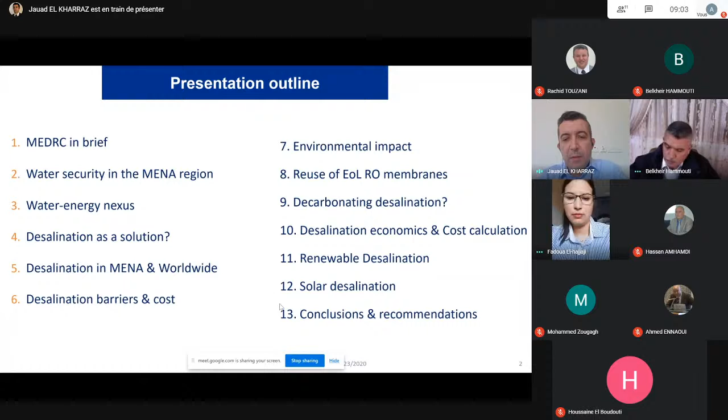I will try to cover also the connection between water and energy, and then go into desalination as a possible solution. What is the state of the art now? What are the challenges? What kind of solutions do we have right now, and how can we make it sustainable? And I will end with some recommendations and conclusions.

So MEDRC is, as I say, the Middle East Desalination Research Center, a research and training center based in Oman. It was created at the end of the 90s of last century. The main mission is to provide solutions for water scarcity in the Middle East and North Africa. We do that by boosting and encouraging research, capacity building and training activities in the region. We also transfer knowledge from around the world to the region, and we mainstream the latest technologies dealing with desalination in particular, and how we can help the region make it sustainable.

Those are some photos from the center. We have a pilot RO desalination unit in the center. We have solar arrays, solar desalination units, and a solar still as well. We have conference rooms for trainings, activities, and workshops. We have an equipped laboratory, etc.

So just a few examples of projects that we are carrying out now in MEDRC. We have this project, for example, about reusing reverse osmosis membranes for wastewater treatment. As you know, with the increasing capacity of the desalination industry around the world, we also have an increasing number of membranes, which is a solid waste that we need to deal with. So we are proposing through this project to recycle or reuse these membranes for other applications. In this project, we are partnering with many partners from Spain and from Oman.

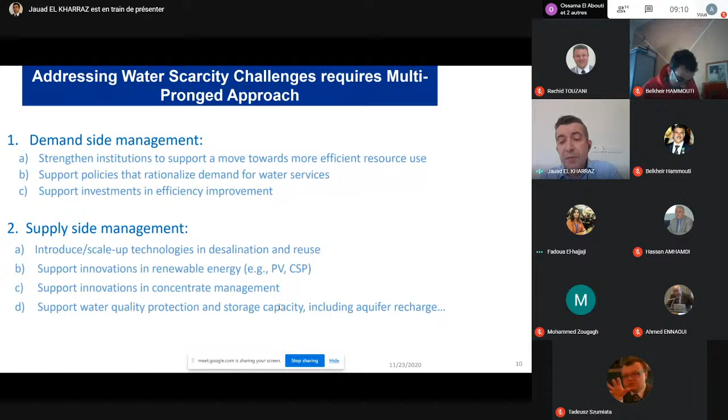We need to support innovation in concentrate management, which is one of the biggest challenges in the desalination industry. And we need to support water quality protection and storage capacity, including aquifer recharge, etc. In Morocco, by the way, we have a very interesting approach, which is le contrat de nappe, the aquifer contract, which is a very interesting approach to deal with the groundwater in Morocco.

Also, we need to talk about the water energy nexus. Why? Because water and energy are very interconnected. So to ensure water security, we need to take care also of the energy, because, for example, desalination consumes a lot of energy; it is an energy-intensive technology. If we talk globally, the water sector uses around 4% of global electricity produced. In particular, 40% for abstraction, 25% for conveyance, and 20% for treatment of wastewater mainly.

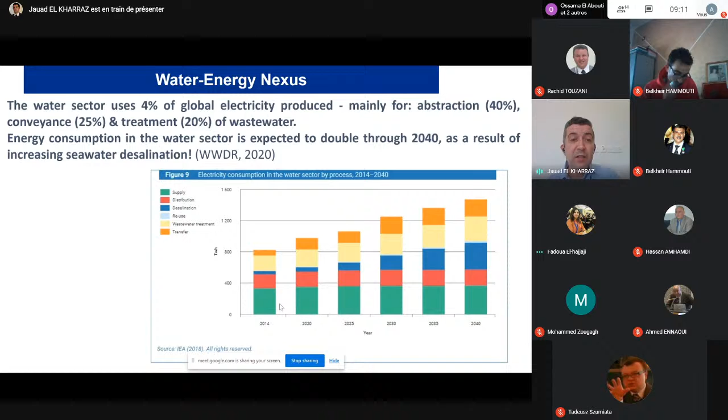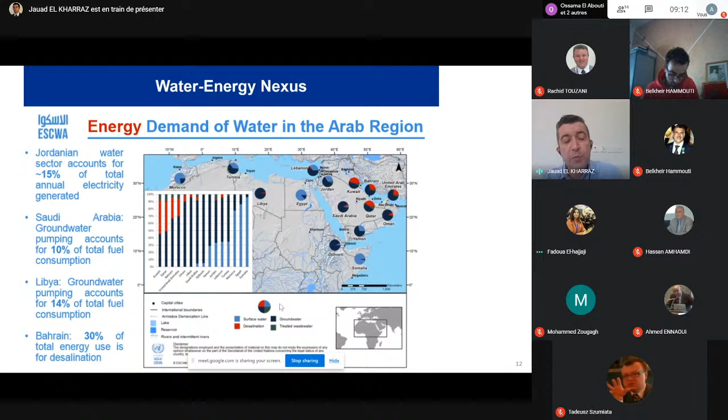Some facts from some Arab countries. For example, in Jordan, the water sector accounts for 15% of the total annual electricity generated. In Saudi Arabia, groundwater pumping accounts for 10% of total fuel consumption. In Libya, groundwater pumping accounts for 14% of total fuel consumption. And in Bahrain, 30% of the total energy used is for desalination. The statistics are coming from ESCWA in Beirut.

So, is desalination the solution to ensure water security? Obviously, this is a legitimate question. In the MENA countries, we have access to seawater. And if we look, 80% of the population is concentrated in the coastal area, and the big cities are in the coastal areas. So desalination definitely is a critical component of the solution.

And if you look at the water policies or strategies around the region, whether national level or regional level, for example, the Mediterranean Water Strategy, or the Western Mediterranean Water Strategy, or the Water Strategy of the Arab League, in all of those policies or strategies, you will find desalination as one of the main components of the solution.

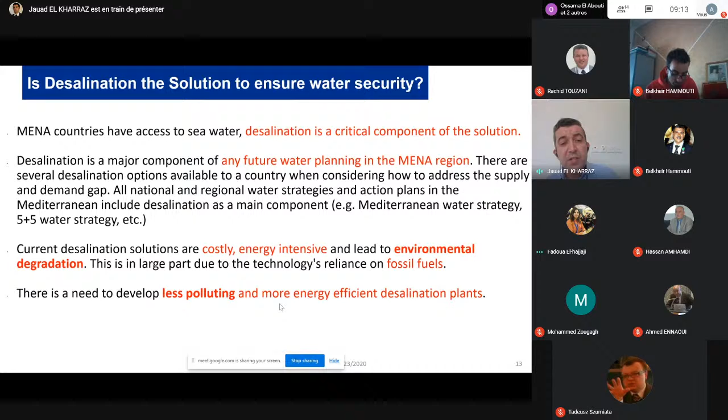But the current solutions actually are costly, energy intensive, as I said before, and lead to environmental degradation. We need to deal with environmental impact. And this is in large part due to technology reliance on fossil fuels. So there is a need to develop less polluting and more energy efficient desalination plants.

So what is desalination? Desalination technologies are, in general terms, water treatment processes that produce fresh water from saline water. That could be from ocean, sea, or brackish groundwater. As I said before, that represents 97.5% of the water available on Earth. Almost 97% of the available water on Earth is ocean or sea or brackish water.

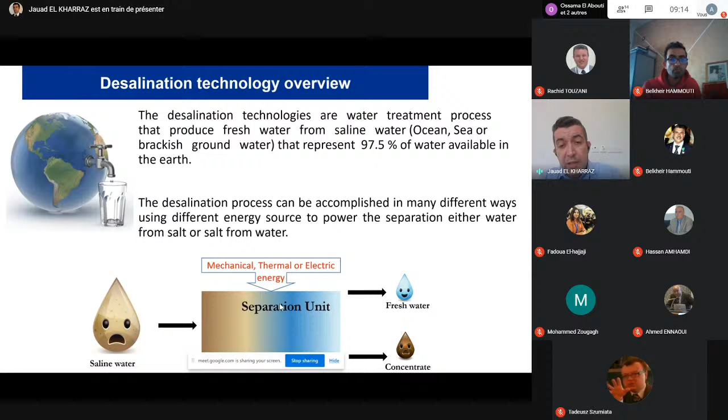So the desalination process can be accomplished in many different ways, using different energy sources to power the separation between the water and salt. So either mechanical or thermal or electrical energy to separate the fresh water from the concentrate or from the salt.

In general, we have different ways to classify such technologies, according to three criteria. What is extracted from saline water? Are we extracting salt or are we extracting water? Obviously there are some industries that are extracting salt and minerals from the salty water. Also the type of separation, whether we talk about thermal desalination or membrane-based desalination technologies. And the third criterion is the type of energy, whether we are using mechanical energy or thermal energy or electrical energy.

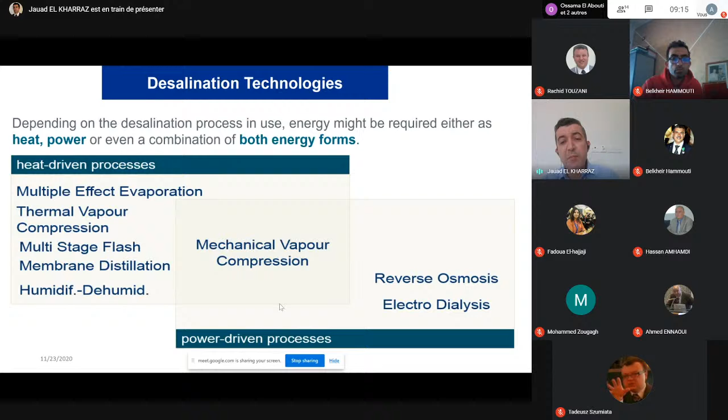I can show you here the most common or popular desalination technologies that we know. Energy might be required either as heat, power, or even a combination of both energy forms. So we are talking, for example, about heat-driven processes, in particular multiple effect evaporation, or TVC, MSF, the multi-stage flash, or MD, membrane distillation, or humidification-dehumidification. In the middle, using both energy forms, we can talk about mechanical vapor compression. And if we talk about only power-driven processes, we can mention reverse osmosis, RO, or electrodialysis, for example.

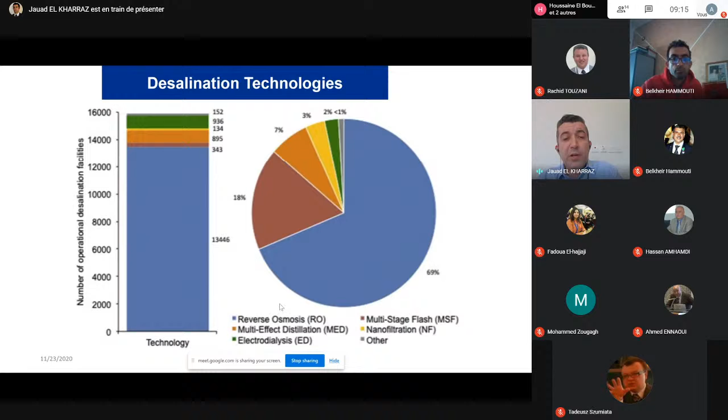Now, with the state of the art around the world, almost 70% of desalination plants are now RO, membrane-based technologies. Second in the ranking, we have MSF and we have MED. But according to the forecast for the upcoming years, RO will gain more and more margin in the market. So RO is the most popular nowadays. I will explain why later.

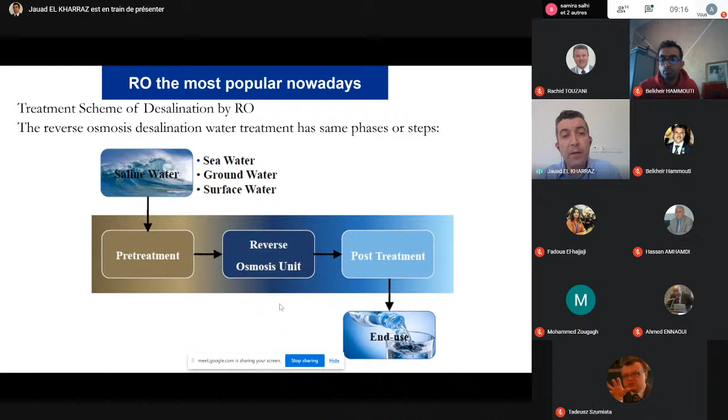The treatment scheme of desalination by RO. Whether we talk about seawater desalination or brackish water, groundwater or surface water, whatever the source of the saline water, we need the pretreatment first, then the RO unit, where we have the membranes and the different components of the RO system, and then a post-treatment. So we adjust the quality of the water depending on the use we are looking for, either drinking or agriculture, or whatever use we are intending in adopting RO technology.

In the pretreatment phase, obviously we have the intake and the screening. For example, we have the intake in the seawater to bring the water into the plant. And then in the pretreatment we use sand filters, we use cartridge filters. Sometimes we even use a DAF system, which is more common in the Gulf because of harmful algae blooms that proliferate in the sea. And we have some chemical injection. We need chemicals, obviously: chlorine, sulfite ions, scale inhibitor. So the pretreatment is important in order to push better quality water into the RO system.

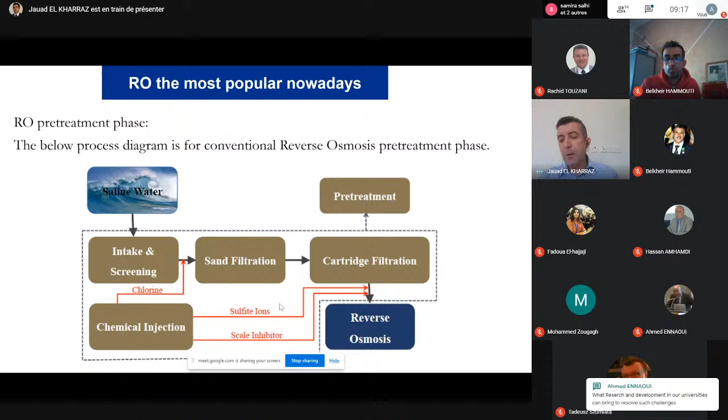And in terms of RO, we have the high pressure pumps, which are necessary; we need high pressure, so we need high pressure pumps in the RO system. We have the RO modules or membranes. We have the energy recovery devices, which are meant to improve the energy efficiency of the system. And we also do cleaning.

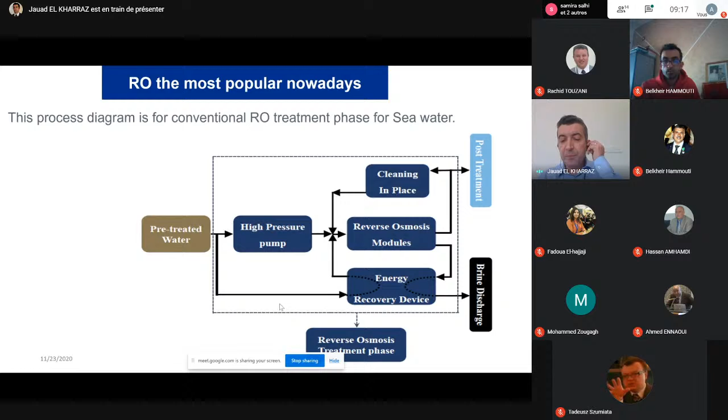So we produce fresh water from one side, and we produce the brine discharge, or the very salty water, that I will talk about later. And then obviously we have the post-treatment. In the post-treatment, we need to adjust the pH and remineralize, add some minerals. Much of the bottled water on the market uses desalination. Once they have the desalinated water, they need to add some minerals, and depending on the brand, there is less or more concentration of magnesium, sodium, etc.

And we also do disinfection. So again, it depends on the end user, whether it is the consumer at the houses, or the farmer, or whoever is the user. So we adjust the quality of the water accordingly.

Some facts about desalination. If you look at islands, for example the Maldives, a very popular tourist destination, or Malta, which is very close in the Mediterranean, or the Bahamas, all of them meet their water needs through desalination. Energy is the largest single expense for desalination plants. As I mentioned, whether thermal or membrane desalination technologies, around 30 to 50% of the cost is from electrical energy.

Desalination plants around the world consume more than 200 million kilowatt-hours each day. It takes 2 liters of seawater to make 1 liter of fresh water; it depends on the efficiency of the system, this is just an average. Desalination takes only a quarter of the electricity to generate drinking water as it did in the 80s of the last century. Huge improvements in energy consumption: we have more efficient pumps, better membranes, and better energy recovery devices.

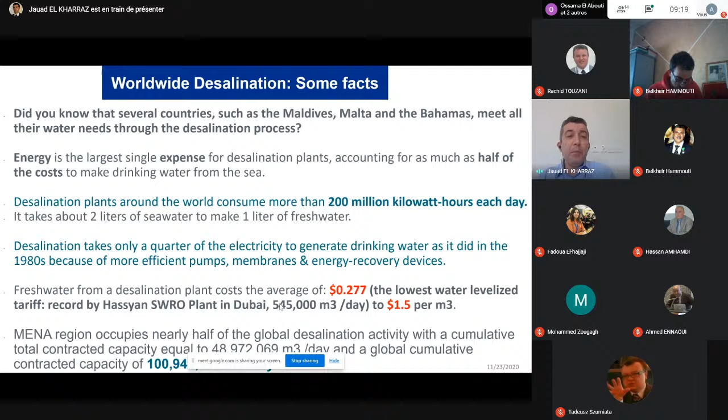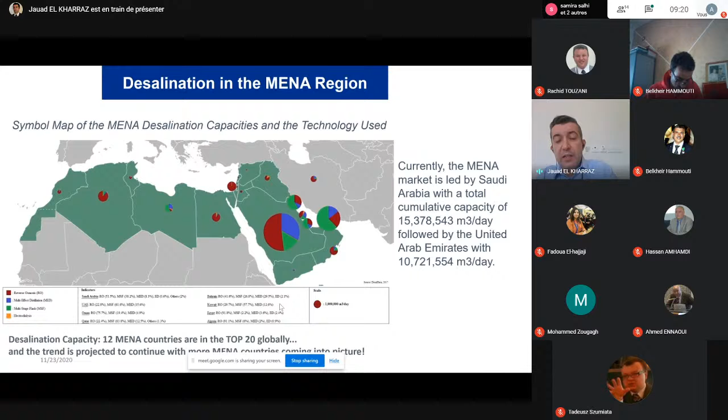The MENA region is producing half of what is produced in the world in terms of desalinated water, around 48 million cubic meters per day. The first producer of desalinated water is Saudi Arabia, with a capacity of more than 15 million cubic meters per day, followed by the UAE, then other Gulf countries like Kuwait, Qatar, Bahrain, Oman, and Algeria, and increasing capacity in Egypt. Jordan has a project, and in Morocco and Tunisia we have many projects in the pipeline.

The first phase will produce 275,000 cubic meters per day, and there is an expected extension of around 175,000 cubic meters per day, which will make the plant produce 450,000 cubic meters per day, one of the biggest plants in the world, producing water not only for drinking, but half of it will be for agriculture. So this is a very interesting project in Morocco.

This is a photo of it; it's still under construction. As I said, it will be operational next year, and the first phase will produce 275,000 cubic meters per day. It is developed by Abengoa, the Spanish company, and it is an RO plant.

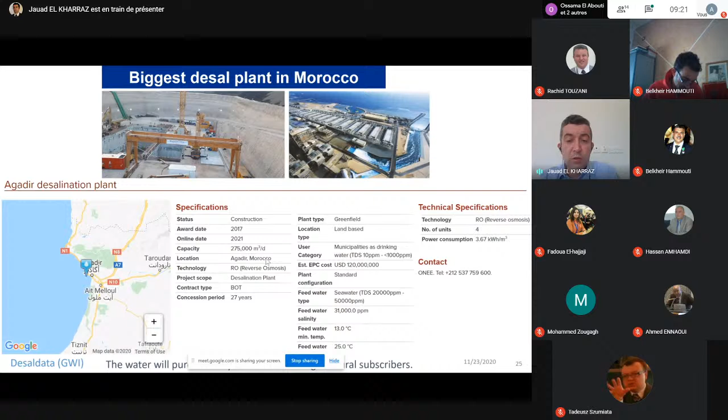Also desalination, as I said, is in general used to produce drinking water. Almost all the Gulf cities, for example Dubai, Doha, Muscat, all of them are consuming desalinated water. But we also have some applications in agriculture. In the south of Spain, Almeria and Murcia, because of the agriculture activity and the water scarcity, they are using desalination also for agriculture. And in Oman as well, in the north of Oman, a lot of farmers, around 100 farms at least, are using desalination units to produce water for their agriculture.

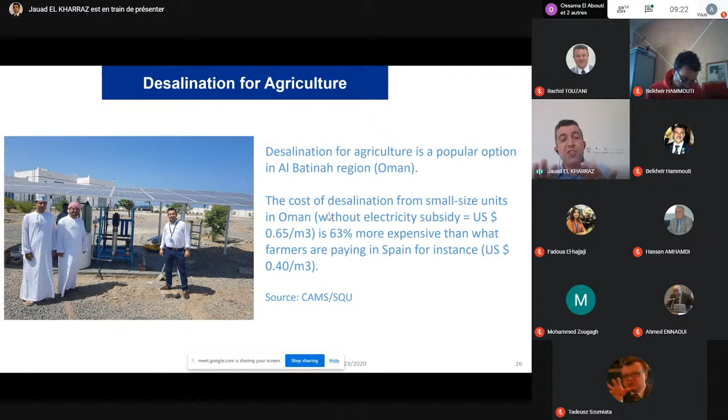And the cost is actually around $0.65 per cubic meter. But again, this is a complex aspect because we are talking about a price without taking into consideration the subsidizing of electricity. Here, water and electricity are very heavily subsidized. Obviously, this reduces the cost. Otherwise, the cost would be much more expensive. In Spain, $0.4 per cubic meter, but there are some considerations. They are mixing fresh water with desalinated water, and this makes the water affordable for the farmers.

Is desalination a sustainable solution? We have some of the biggest challenges, as you know: energy consumption. Thermal desalination, we're talking about 10 to 20 kilowatt hours per cubic meter; RO less than 10, now around 3.5 kilowatt hours per cubic meter. We have the cost, capital or operational cost. We have what happens in RO plants especially, fouling and scaling, which happen often in the membrane. So we need to change the membrane or increase the operational cost.

And we have, in particular, the environmental impact. The energy consumption, carbon footprints. We know that Morocco and many countries in the region are all committed to the Paris Agreement in terms of reducing CO2 footprints. So we need to look at this, and we also need to look at the brine discharge, because desalination plants are producing fresh water, but they are also producing the brine, which is a very concentrated salty water, but also with some chemical concentration. We need to deal with it to reduce the possible impact on the marine ecosystem.

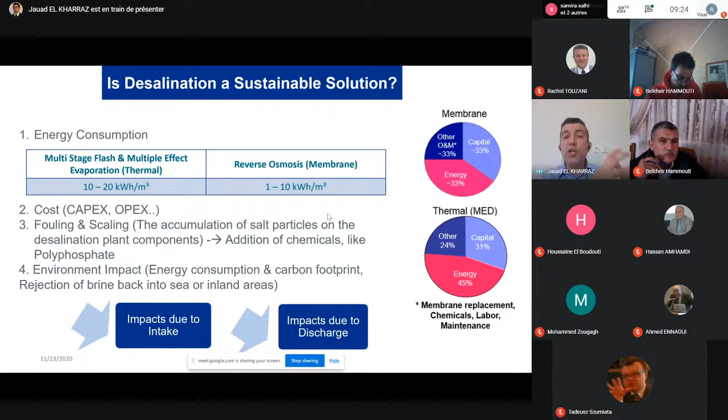And if we talk about brackish water, we also need to find solutions in order to avoid contaminating the groundwater. But there are also some considerations around the impact due to intake, because once you install desalination plants somewhere on the coastal area, you need to install an intake system into the sea. So you need to take a lot of considerations before installing your intake system. In terms of desalination energy consumption, as I said before, we have witnessed a very considerable

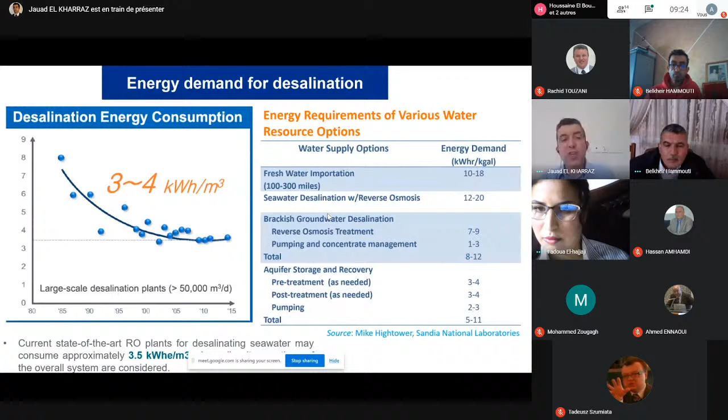other water options. These are some statistics about the energy consumption per cubic meter of water in desalination projects in the last 20 years. And you can see that we are now more and more going under 3 kilowatt hours per cubic meter.

Is there a question or something?

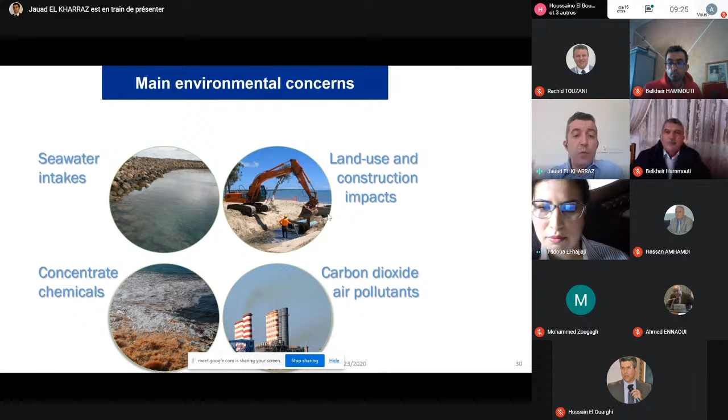It's okay. In terms of the main environmental concerns, we can talk about the seawater intakes. We can talk about the concentrates, chemicals, the brine. We can talk about the land use and construction impacts. And we can talk about carbon dioxide, air pollutants, or the carbon footprint, CO2 emissions.

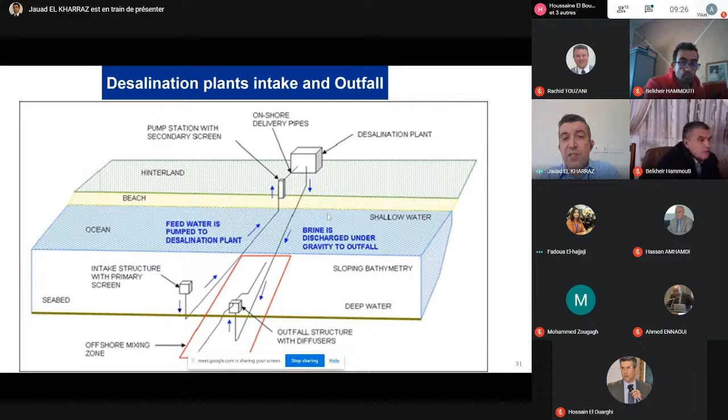In terms of desalination plant intake and outfall, this is very important. We are talking about projects that cost more than $100 million, even double or 3 or 4 times this cost. So we need to take into consideration many engineering considerations, but also many environmental considerations. This is just to show you the onshore delivery pipes and the offshore mixing zone. We need to find a way to discharge the brine safely without harming the marine ecosystem. The brine disposal is done in this way.

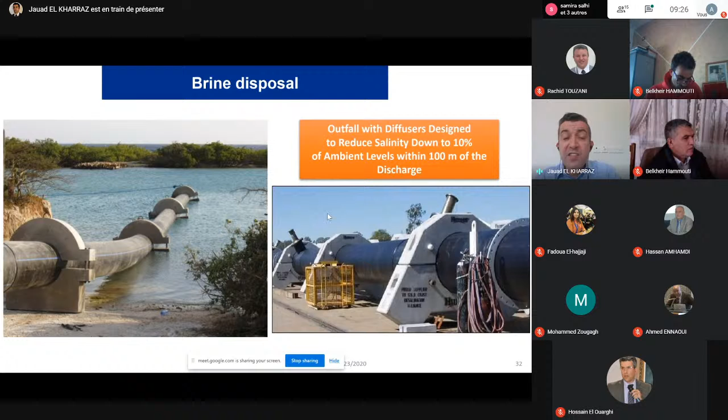The outfall with diffuser is designed to reduce salinity down to 10% of the ambient levels within 100 meters of the discharge. Obviously this is in general decided in the terms of reference of the decision maker in the country. Whenever you give permits to a company to construct desalination plants, you have some terms of reference that you need to deal with, and you have the environmental impact assessment study that you need to do in advance, in a way that seeks the least impact on the marine ecosystem. But again, even so, we have an impact.

Due to the intake already, we have the intake seawater, which is not mere seawater, but a habitat which contains an entire ecosystem: phytoplankton, zooplankton, larval forms of invertebrates and fishes. So you cannot just install it like that. You may destroy this ecosystem. The major impact could be on animals larger than the mesh, injury due to impingement effects.

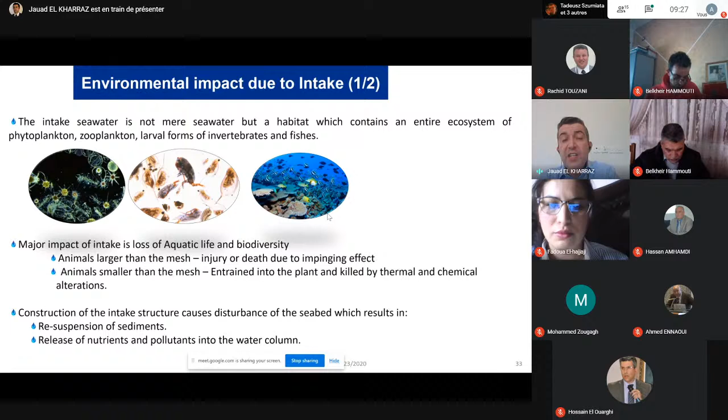So when you install your screening intake system, you may kill some fishes, the big ones, and also the smaller ones can stay stuck in the screening system, so you kill them that way. And the construction of the intake structure causes disturbance of the seabed, which can result in re-suspension of sediments and release of nutrients and pollutants into the water column.

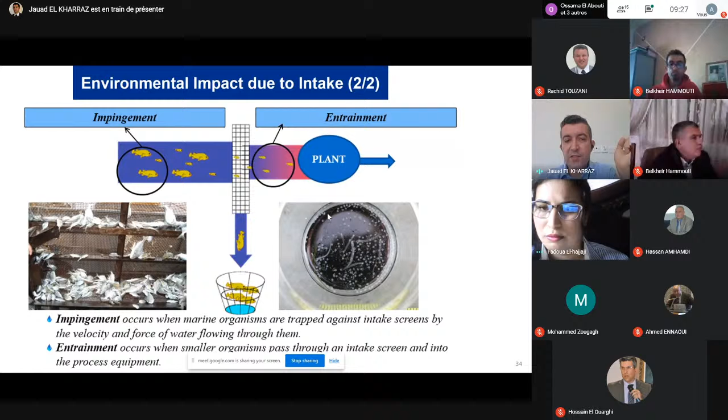So this is just to show you what happens for the big fishes and the small ones, what we call impingement and what we call entrainment that happen in the screen and the intake system. The brine discharge: the brine is a fluid waste from this plant, which contains a high percentage of salt and dissolved minerals. It is disposed back to the sea and diffused according to different aspects. So we obviously need to respond to the legislation. That's why it's also important to have a strong and strict legislation that the company should respect whenever it comes to those kinds of constructions.

And the brine discharge plume: the brine might be rejected directly into the ocean, the sea, or combined with other discharges. So we need to consider that. There are particular factors that play a significant role in the discharge plume. We need to look at the direction of the wind and the speed, the wave height and speed, the bathymetry, and the tidal mean and average. All these kinds of factors are considered in general in the environmental impact assessment studies.

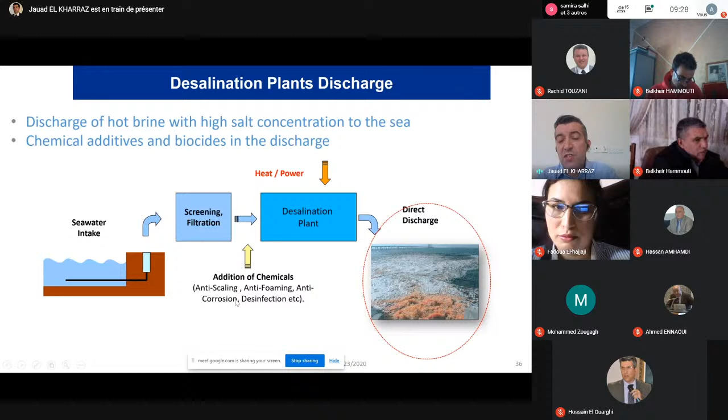So just to show you here quickly the discharge of the hot brine with high salt concentration to the sea, the chemical additives and biocide in the discharge. So you have this kind of configuration. You may find a lot of chemicals in this brine, which is discharged into the sea. The impact due to the discharge.

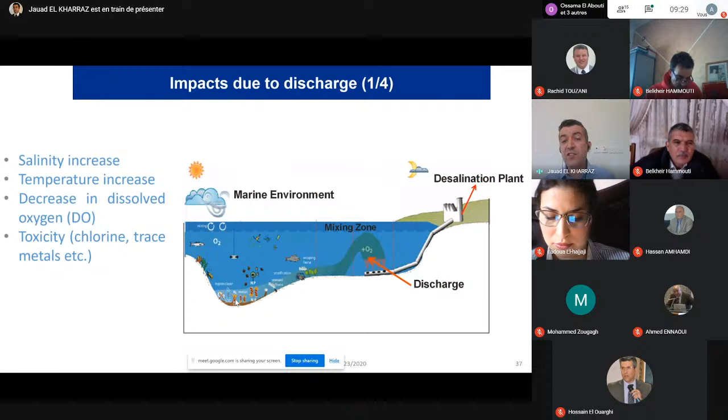So we have the impact of increase in salinity, an increase in temperature, especially in thermal desalination plants, where we have an increase of temperature in the brine, a decrease in dissolved oxygen, which may cause problems to the marine ecosystem and to the fish, and toxicity caused by the chlorine, the trace metals, and different kinds of chemicals that are used in the process. So for the high salinity, we need to take some measures in order to reduce the salinity increase, and the temperature also. And some important impacts are the proliferation of harmful algae blooms.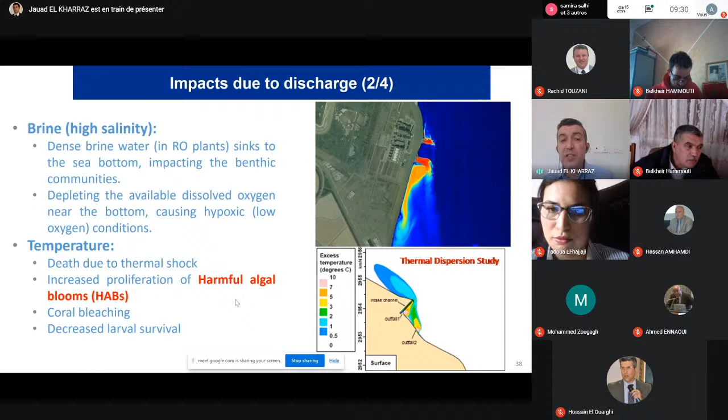I don't think that this problem is happening now in Morocco because we don't have a big desal capacity, and maybe on the Atlantic this problem is less important. But in some countries, for example in the Gulf, on the coast of Iran, we have a very big problem with that, even in California and Japan. So we have the proliferation of those harmful algae blooms, sorts of microorganisms that proliferate, and when they are in high concentration, they invade the coast, so they can get stuck in the intake system. If they pass through the desal system, they can destroy the membranes and cause a lot of problems.

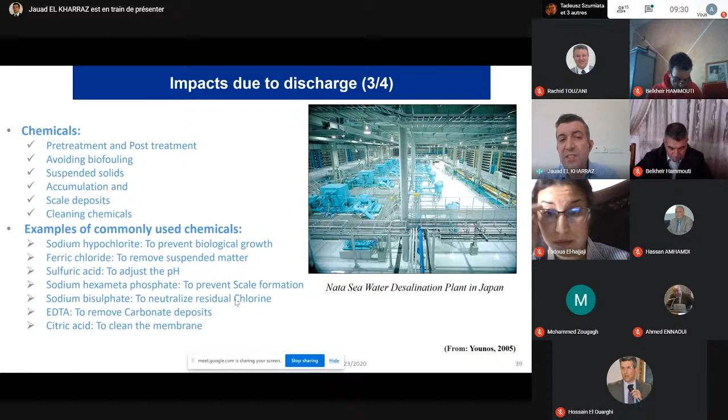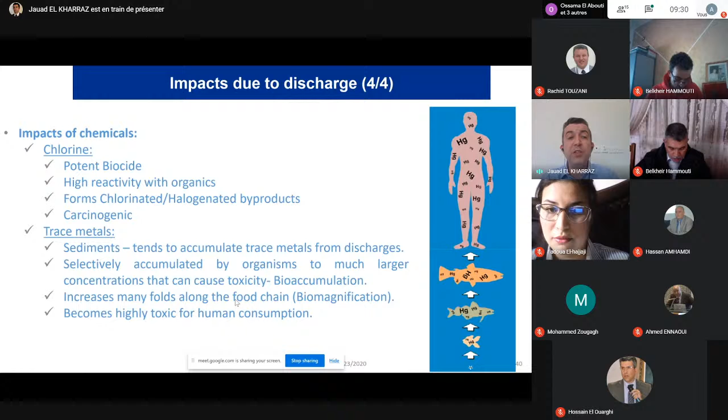In terms of chemicals, we use chemicals, as we said before, in the pre-treatment and the post-treatment, because we need to avoid biofouling and scaling, etc. And we have different kinds of chemicals. I will not get into details. Obviously, such chemicals can have an impact on the fish, but also on humans. If you consume such fish or shellfish or whatever seafood from this area, that could also impact human health.

I saw a publication, for example, showing the contrary, that in some areas where the salinity has increased, there is a better presence of the fish. So this, I think, needs to be further studied, because this is not really the case in general. In general, the increase of salinity will alter the marine ecosystem and has a negative impact.

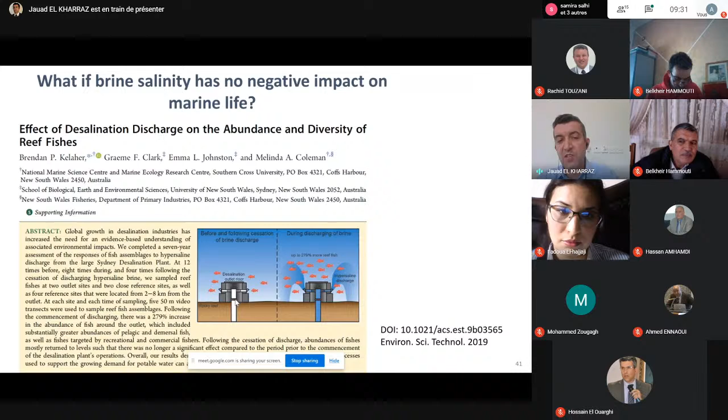So we need to mitigate those impacts. We can adopt mitigation measures for the intake and also mitigation measures for the discharge. The first thing is we need a proper site selection for intakes, which reduces the aquatic loss caused by entrainment. So we need to construct the plant in an area, as you can see here, where we take into consideration the current, the wind direction, and the area where the fish have the larval area or the spawning area. So we need to avoid those areas to make the right selection of the site.

In terms of impingement mitigation measures, we have some technical aspects that we can use: the light, acoustic fish deterrent, velocity cap. Sometimes we use vertical wells or infiltration galleries. For example, in Oman, there is one plant in Sur which is using beach well intakes. This is very interesting because the beach well intake provides better feed water quality. I think for 8 years they never changed the membranes.

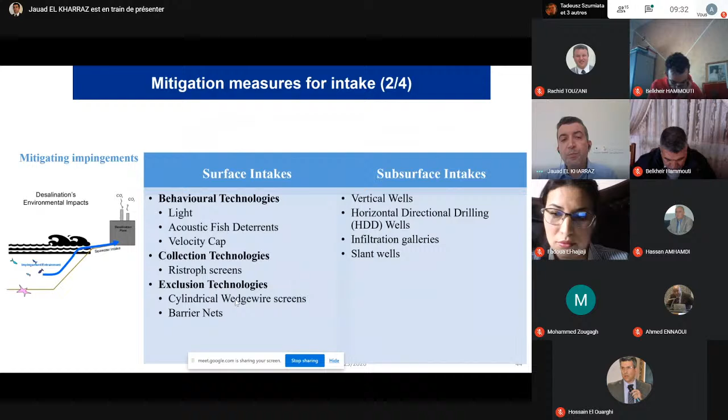But obviously the beach well intake, you cannot do it everywhere. It depends on the geology of the area and many other considerations. So these are just some techniques that we use in the intake system to avoid the passage of fish and some other sea life. And the subsurface intake, so we have different kinds of intake system. Again, this is horizontal directional drilling. We can do it in some areas, but it's not possible everywhere. And we have vertical beach wells as well.

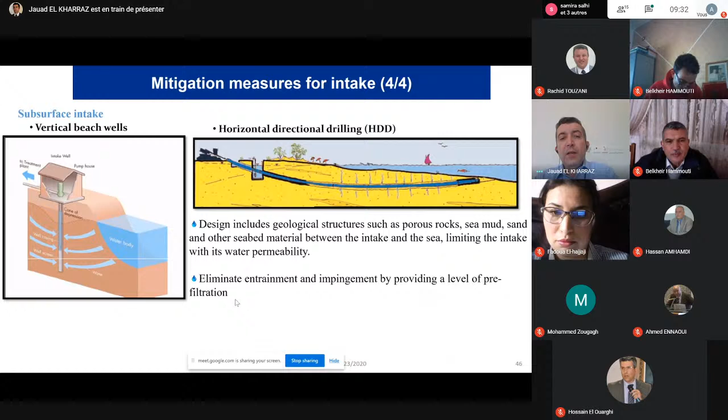The precautions that we can take: the impact on the population level is not clear given the naturally high mortality of larval organisms in marine systems. Appropriate screens and low intake velocity on open surface intakes can minimize the impingement, and locating intakes away from biologically productive areas can substantially reduce or eliminate entrainment of small planktonic organisms, etc.

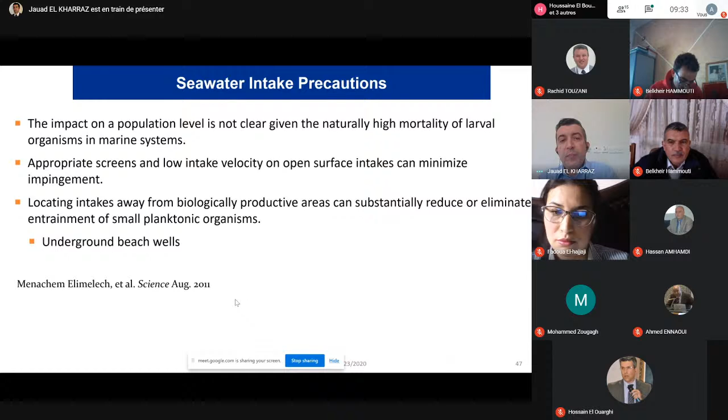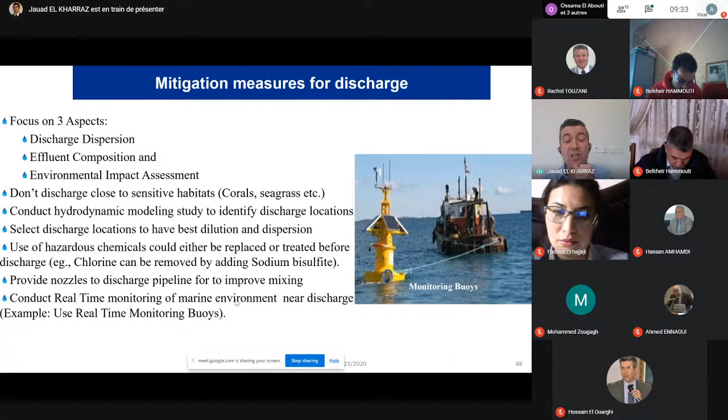So the three aspects that we take into consideration in the discharge are discharge dispersion, so we cannot just discharge in an area without dispersing this brine; effluent composition, so some legislation makes the companies try to reduce the concentration of some chemicals in the brine before discharging it; and the environmental impact assessment, which is a must whenever it comes to a desalination project.

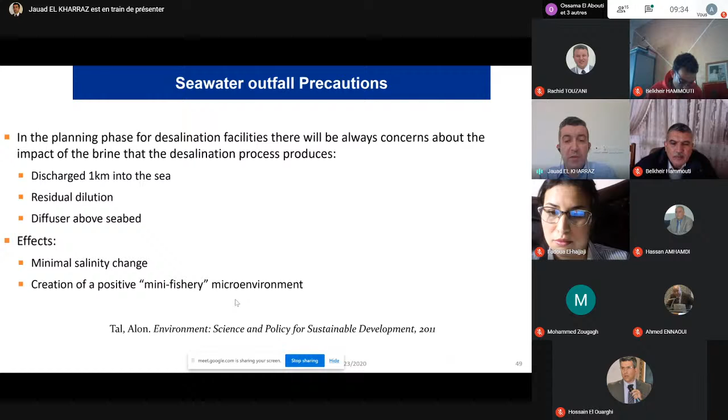In the case of brackish water desalination brine, we use evaporation ponds. It is very popular, but again, it's a very basic solution. But if you are dealing with a small desalination unit, it's fine. It could be a good solution. You put the brine into an evaporation pond, حوض تبخر, and you wait for this liquid to evaporate with the solar radiation, and then the concentrated salt, you can deal with it easily.

But we have other solutions, deep well injection, which needs a study of the geology of the area. We can have some other solutions, and even some industries are using the brine, extracting minerals and chemicals from this brine. So I'm not going to detail.

Another kind of waste we need to deal with in the upcoming years is the solid waste. As I said before, we have more than 20,000 desalination plants around the world, and RO membranes have a life cycle, they cannot last more than 5 or 8 years, sometimes even less. After the life cycle, we need to dispose of them. So landfill is the option in general, and it could add another environmental impact. So we need to deal with it.

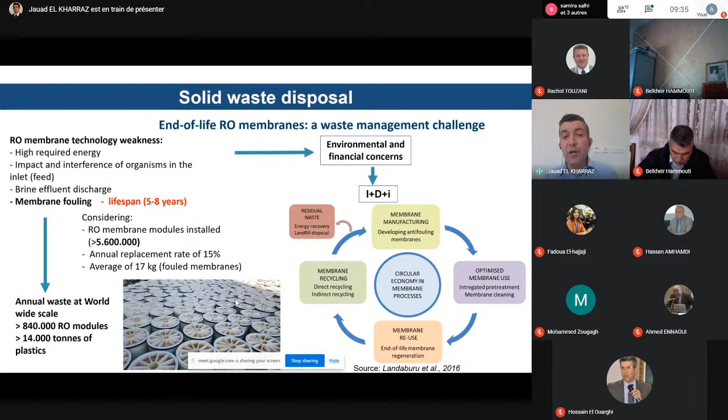So we have solutions. One project we are working on now in MEDREC is the use of end-of-life RO membranes to treat wastewater for industrial and agricultural use, which is funded by the Research Council in Oman. I'm the PI of this project, and the objective is to reuse, instead of disposing, those end-of-life RO membranes. We are extending their life. We are proposing another use for them. For example, by oxidation, we transform them from RO membranes into nanofiltration or ultrafiltration membranes that could be used for other treatment like gray water or other kinds of wastewater.

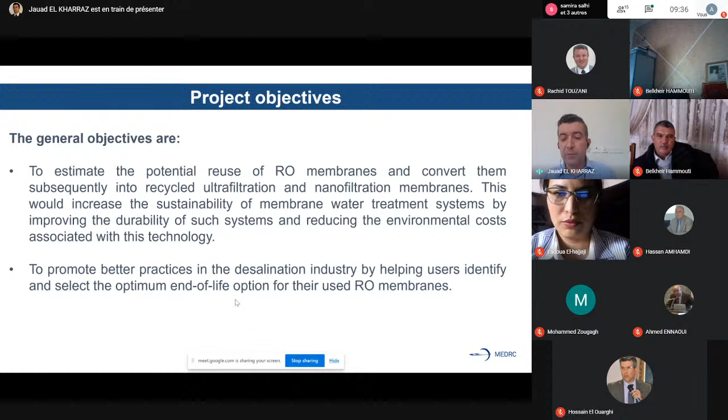So the objective is to reduce the cost of wastewater reuse, to recycle those end-of-life RO membranes, to provide desalination plant operators with a solution for their membrane waste disposal. We can treat wastewater using those kinds of membranes, and provide an additional water supply option for irrigation of sensitive crops.

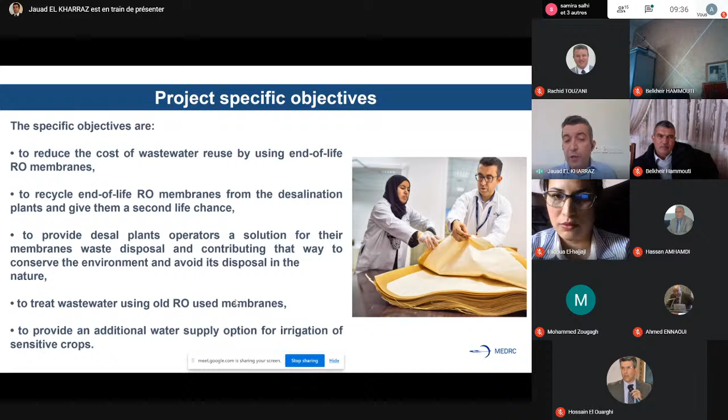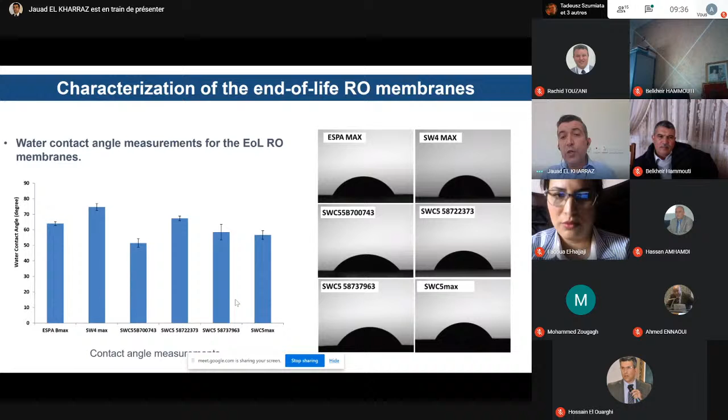So we collect those membranes from desalination plants, and in this project we first do the integrity test, and we do the characterization of those membranes. So we study the morphology of the membrane surface, etc. And then we obviously do the analysis of the permeability, the salt rejection, etc.

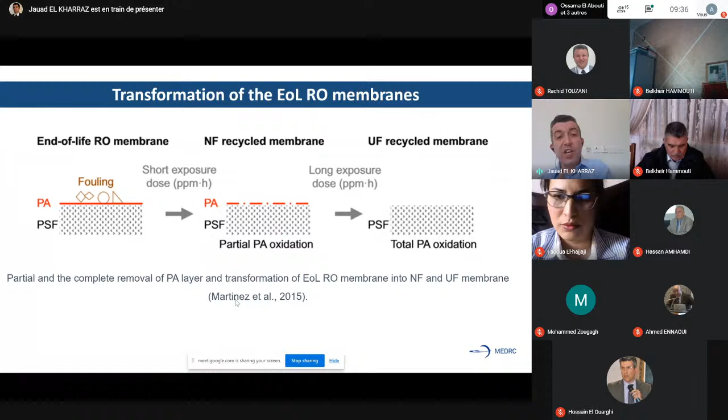And then we try to transform those membranes into, as I said, nanofiltration membranes or ultrafiltration membranes that could be used in other applications. We have another impact, which is the air quality. The air quality impacts of desalination projects are mainly associated with the use of energy during the manufacturing, transportation of materials, especially during the construction of the plants and all the associated infrastructure. So there is some air quality impact.

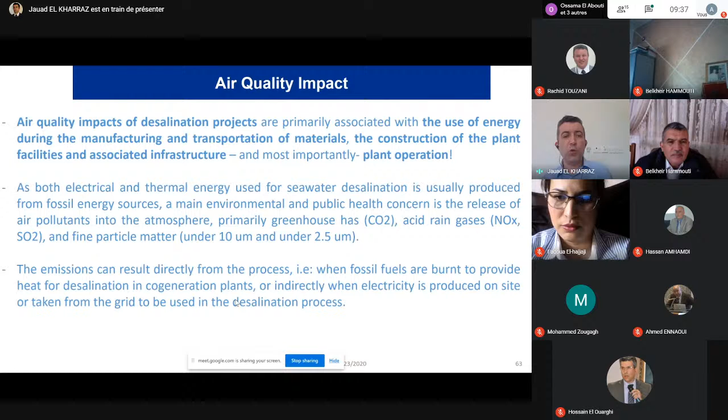Already we have an estimation of these CO2 emissions, and I will give some statistics here. In some plants in Australia and Spain, we have how much CO2 we are emitting from these plants. But I think if we compare it with other industries, it is not really that important. I mean, it's important, but not that considerable compared with other kinds of industries, textile or other industries. But I can give some statistics about the carbon footprint of the current systems.

As a fraction of the world energy consumption and greenhouse gas emissions, this emission is small, less than 0.2% of the worldwide energy consumption in 2013. RO is the most proper technology. We are talking about 1.5 to 3.6 kilograms CO2 produced per cubic meter of fresh water. Obviously, it depends on which kind of energy is used to produce electricity, fuel or coal or gas, etc. For MED technology, we are talking about 8 to 16 kilograms CO2 per cubic meter.

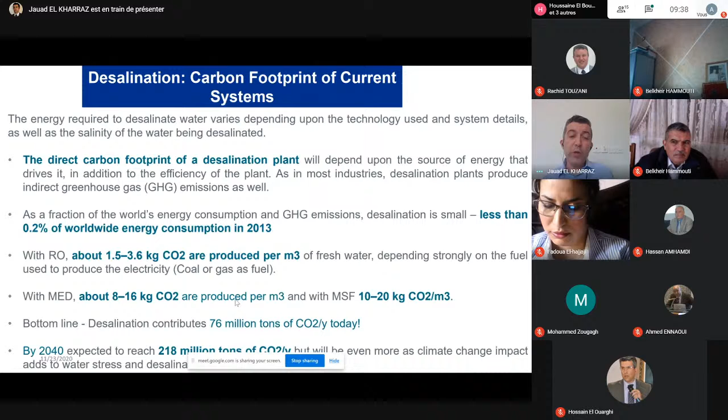So RO is much better than this, and it is expected by 2040 to reach 218 million tons of CO2 per year. So if we are really committed to the Paris Agreement, we need to make an effort in dealing with this.

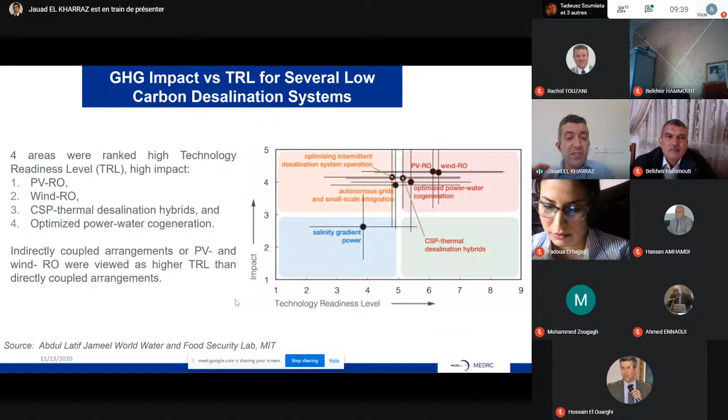This is just to show you a comparison between 4 technologies, greenhouse gas impact versus the technology readiness level for several low carbon desalination systems: the combination of photovoltaic and RO, the combination of wind energy and RO, CSP and thermal desalination hybrid, and optimized power water cogeneration. And we can see that PV and wind RO are the highest in terms of TRL, technology readiness level, than directly coupled arrangements.

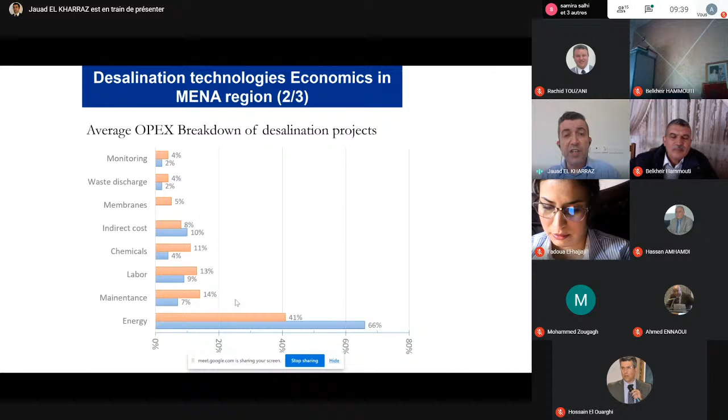In terms of the economics of desalination, the capex and opex, we can compare between thermal and RO membrane. I will try to go fast because I think we are already at 40 minutes. So some comparison between operational and capital cost of thermal desalination and RO desalination. It's clear that RO has been making a difference in the last years. That's why it is now becoming the first player in the market.

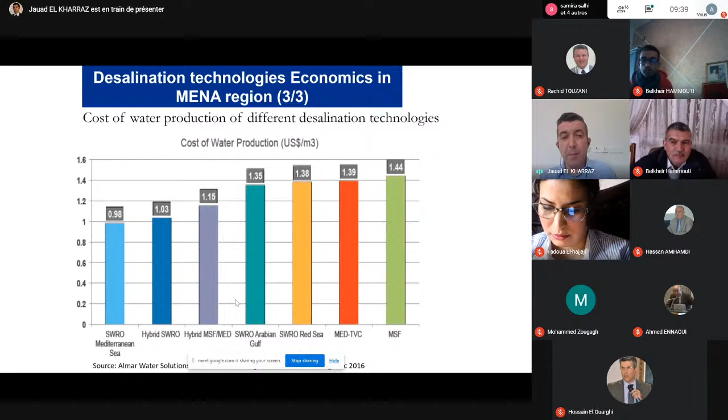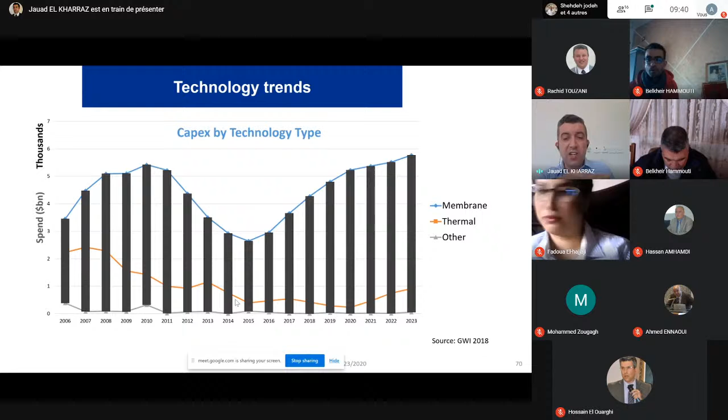This shows you some comparison between the cost of seawater RO desalination in the Mediterranean and MSF or MED in the Red Sea. The cost comparison is a very complex question because it depends on so many parameters. In terms of technology trends, we can see that in the future we are definitely going toward more and more membrane desalination plants rather than thermal, which in the last years is stuck and not increasing that much.

In terms of technology developments, in the last years a lot of research is being done because, as you know, desalination technology is now at the forefront of research to provide solutions for water scarcity. And we are talking about different technologies, membrane distillation, capacitive deionization, a lot of technologies. But again, between the laboratory and the publication and the industry, there are a couple of years, and sometimes it never reaches the industry because it's very complex.

For example, 2 years ago, some researchers at Manchester University published that they can use graphene membranes in RO systems, and it was published in Nature. A lot of people were talking about it, it made a buzz on social networks, etc. But now what happened? It's still not yet in the market because it takes a lot of time to really make it competitive, and see how it will work in real conditions. So those are just some examples of technologies that were promising, but with time it shows they're not really that practical in reality.

So the cost depends on a lot of factors. The plant size, whether we're talking about big or small plants, the maturity, which kind of technology we are using, the water quality, which region. Obviously, desalinating water in the Mediterranean or the Atlantic is not the same as in the Gulf region or the Pacific Ocean. So it depends on where you are.

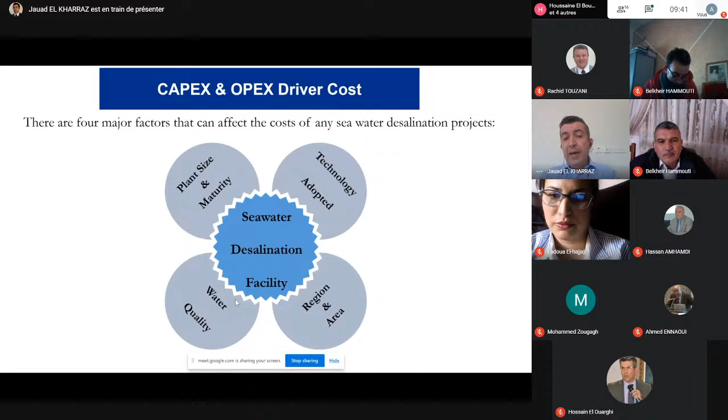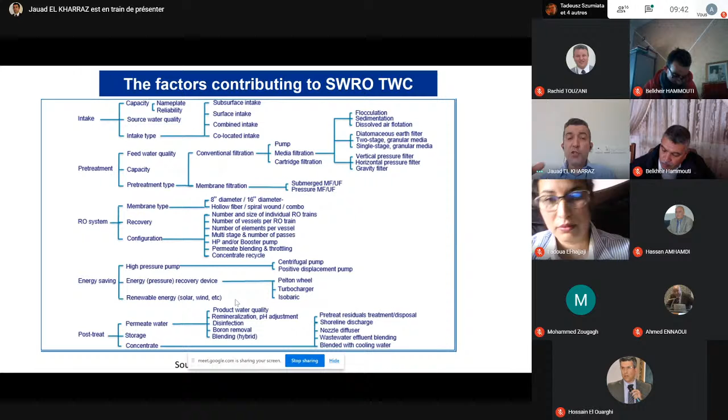The configuration is also important, you know, the membranes, how you put them in the plants. The energy saving, a lot of improvement done at the level of energy recovery devices, the high pressure pumps, the renewable energy now more and more in the markets. And the post-treatment also, we have different configurations. So all those factors impact at the end on the cost per cubic meter.

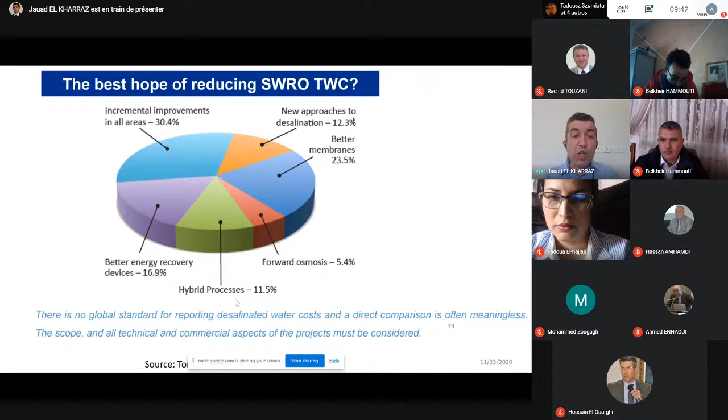In terms of improvement in the upcoming years, I think the improvement would come from different areas. We have some improvement that could be from hybrid processes. So we can combine RO maybe with membrane distillation to get less and less brine. We can forward osmosis, some improvements, some better membranes, probably better energy recovery devices. Still, there is margin to improve in these areas.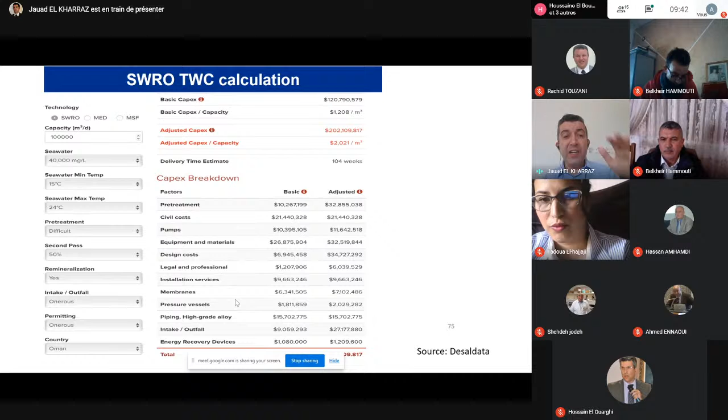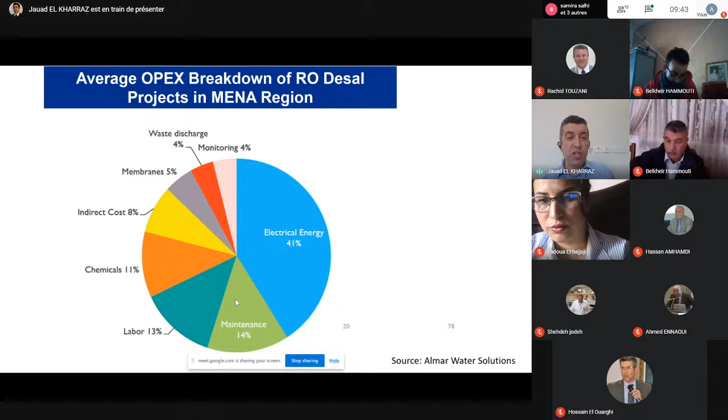So this is just to show you quickly from this Desaldata website that you can do simulations. So depending on the capacity of your plant and the seawater quality, etc., you can simulate how much it will cost you on the capex and the opex and per cubic meter. Okay, and in terms of cost, you can distribute it like that in our operational cost. So almost 40% is coming from electrical energy, and some other costs coming from the chemicals, the labor, maintenance, etc.

In terms of the expectations, there still will be an improvement in terms of cost of water per cubic meter and the construction cost and electrical energy. So we are talking now about 3.5 kilowatt hour per cubic meter for RO, and the thermodynamic limit I think is around 1.2. So I think in the next 20 years we can reach 2.1, 2.4. Maybe it will be impossible to go further because obviously there is a thermodynamic limit, but there is definitely margin to improve in terms of energy consumption, energy efficiency and cost.

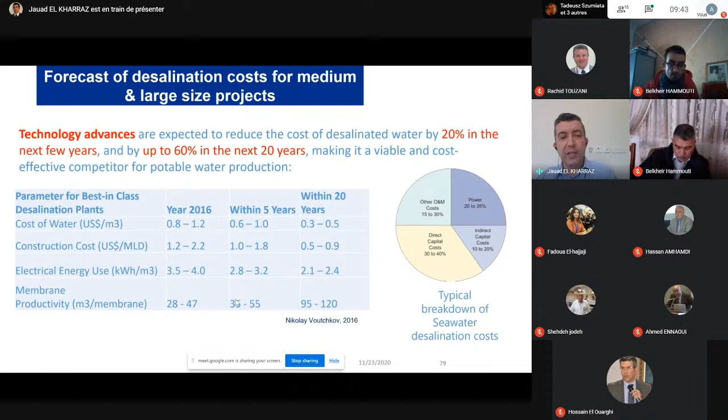Finally, in terms of renewable desalination, we have lots of possibilities. Obviously, the most popular are PV, CSP, or wind energy. And I can show you quickly that some challenges are related to that, the fact that desalination works in general in steady state conditions, while renewable energy, as you know, is not stationary. So we need to deal with energy storage, or how we can adapt to the variable operation.

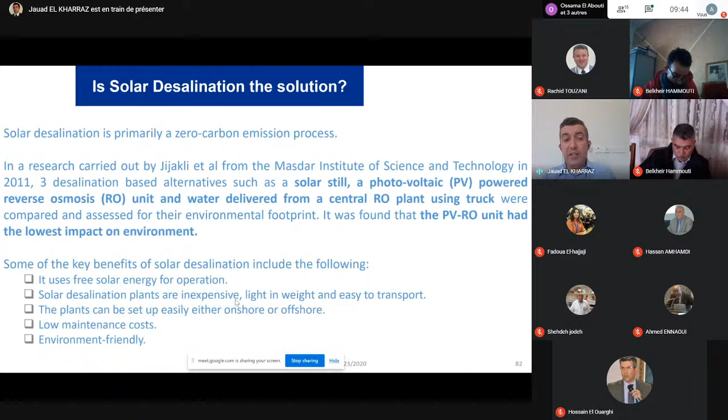Solar desalination is the most popular now at small scale. It's competitive. You can see many solar plants in some areas in Morocco, in the MENA region, because solar desalination plants are inexpensive, are cheaper. They have low maintenance cost. It's environment friendly, so there are lots of advantages. But the big scale is still challenging. I'm talking about more than 10,000 cubic meters per day production.

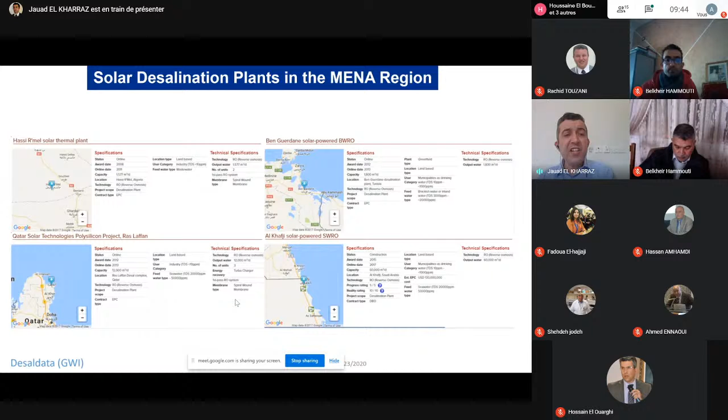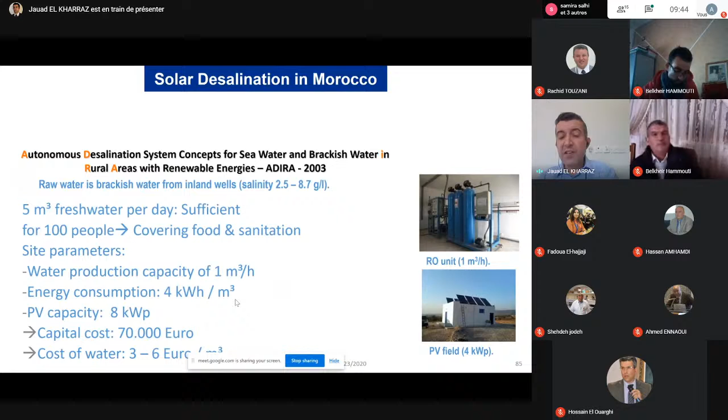We have still some plants, in Algeria, Morocco, Qatar, Tunisia, just some examples. In Morocco, this project I participated in somehow indirectly in 2003. So 17 years after that, the same project, we can reproduce it in Morocco. We are going to get a much lower price or cost of the cubic meter. In Saudi Arabia, they have one of the biggest plants powered by solar, I think 60,000 cubic meters per day, the Al Khafji plant.

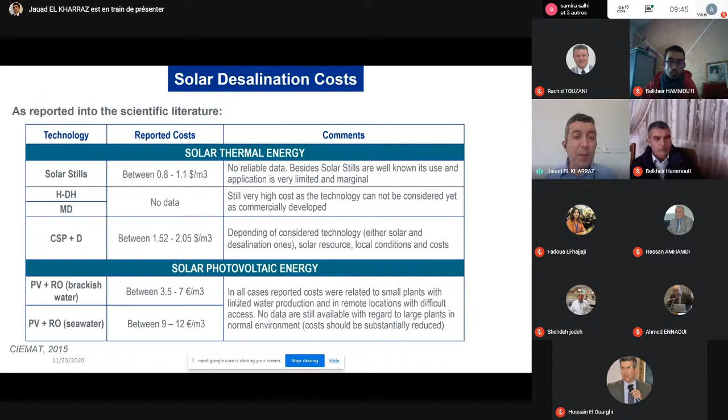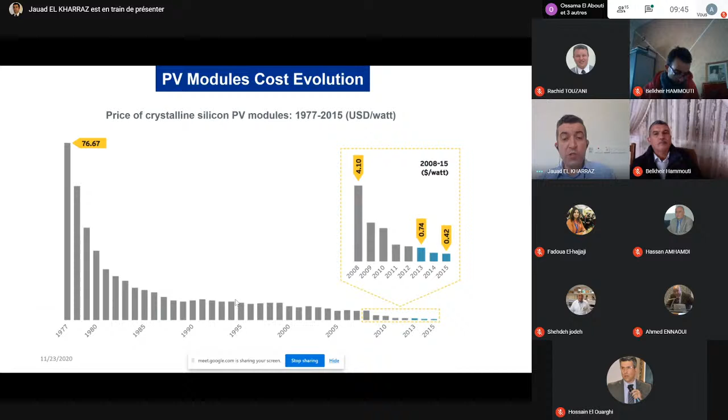In terms of the comparison between CSP and PV, in the last 20 years there was a lot of discussion, lots of research on that. CSP was very promising, but in the last year there is, I think, more trend to go to PV. But again, it depends on brackish or seawater desalination, depends on big or small scale. The PV modules have decreased considerably in terms of price, which encouraged PV deployments. The cost is becoming competitive when we're talking about 500 or 5,000 cubic meters per day with conventional desalination cost.

The conclusion finally, desalination on a large scale has environmental and energy implications. So the brine, the greenhouse gas emissions, the energy security. So we need to make it sustainable. Renewables through PV, for example, or CSP are possible, making this feasible energy.

MENA countries are on the cutting edge of innovation, combined use of desalination with renewable energies. We have many examples in UAE, in Oman, in Morocco, in Tunisia. Advantages of PV become decisive for standalone configuration and small size systems. Whenever we have remote areas or small villages, it's definitely a good solution.

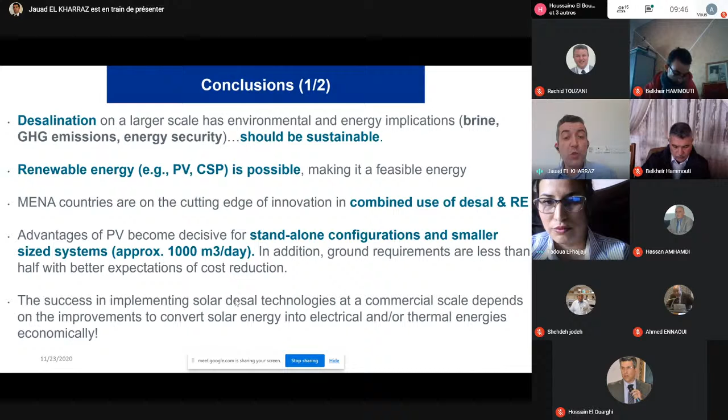The success of implementing solar desalination technology at commercial scale depends on the improvement to convert solar energy into electrical or thermal energies economically. And finally, PV is often combined with RO. So we have electricity storage, which is still challenging. I hope that next year we will have some improvement in terms of battery costs. Decentralized solar-powered water desalination systems offer independence to help avoid being taken hostage by price rises.

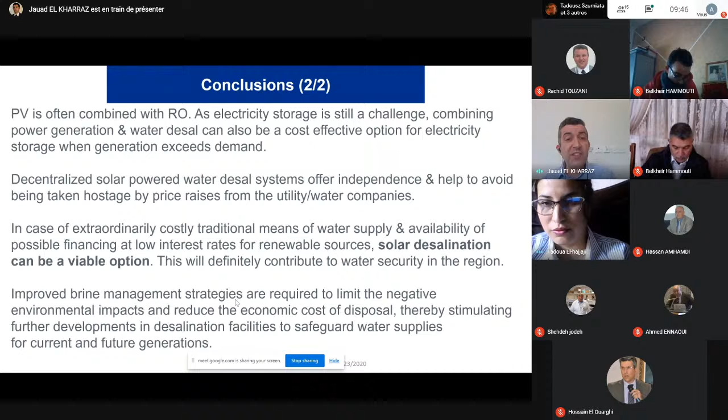I will quickly mention the last one, which is improved brine management strategies are required to limit the negative environmental impact. So we have different kinds of solutions now in the markets. And finally, the final slide, sorry for the time, recommendations. So the current technologies are still very energy intensive. There is a need to develop low energy driven processes, which could be integrated with renewable energies.

Special attention should be paid to renewable safe energy sources, of which the most important is solar, which can have enormous potential, as Morocco holds one of the highest solar potentials in the world. Public-private partnership or build, operate, transfer financial mechanisms could be very important. We applied this in the Agadir desalination plants.

And finally, countries of the region must invest in capacity building and in localizing sustainable desalination technologies to ensure water security. Why am I talking about that? Because still, after 50 years of desalination deployment in the region, we are not able to produce or fabricate any component of the desalination plants.

So if there is any other crisis like the pandemic this year, I mean, we had some problems and some fear in the plants when China closed the borders. A lot of plants were worried about the chemicals importation, because all the chemicals are in general imported from China, etc. So we need to also look at the localization of the technology.

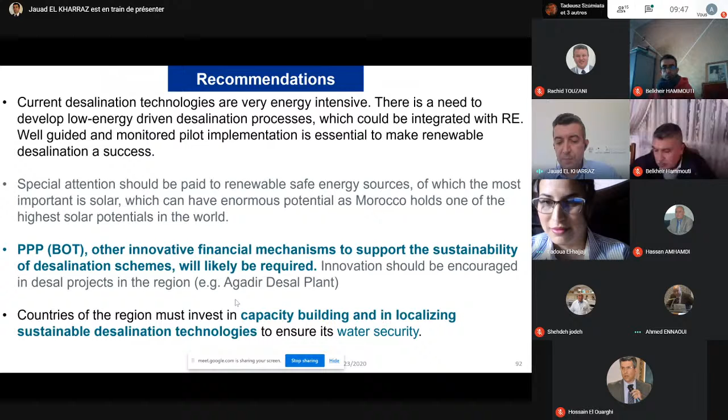First of all, thank you, Professor JAUAD, for this excellent review on water desalination, which is a very important topic, especially for Morocco. I want to make one question which is very general, and I wrote it down in the archive of the conference. There are plenty of nations which are water scarce countries. Morocco is one of them, especially South Morocco, which is confronted with drying groundwater reserves, a strong dependence on rain-fed agriculture, and also water pollution because of the lack of functioning sanitary networks and wastewater treatment.

And my question is, do you think it's not time to have a task force in Morocco to face these challenges? And the second question is, I think technologies related to material science, for example, membranes, are a very important research topic. And I haven't seen in Morocco any call regarding this kind of research, like membranes for water treatment, either heterogeneous or homogeneous water treatment using, for example, materials. Titanium oxide is a material which is used very much for water depollution, etc.

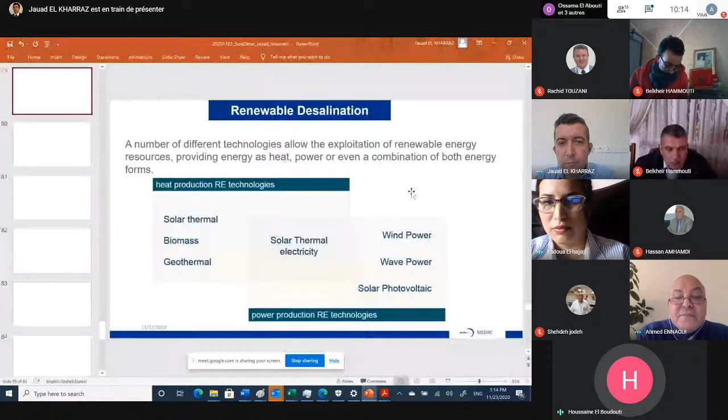Is it graphene, because it's really nanometric, or some monolayers of graphene in such a way that it will be a layer with some millimeter or something like that of thickness? Thank you. Yes, thank you very much.

Yes, the current membranes that we use have three kinds of layers. When I showed the slide about the transformation of end-of-life RO membranes into nanofiltration or ultrafiltration membranes, once they are used after 5-8 years, instead of throwing them away, we do some transformation using an oxidation process to use them for other applications. With the graphene membrane, the idea is to replace the polyamide layer.

I know that this is used for now in the RO membrane, and the graphene could improve the qualities, as I said, of permeability, salt rejection and the efficiency of the system. So it's about replacing the current membrane that we use now in the RO system.

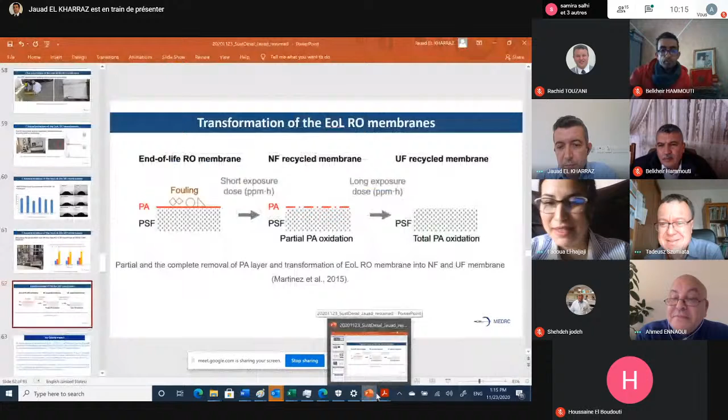Okay, thank you very much. Very, very interesting conference. Thank you. Good morning. May I ask a question? May I ask a question? Yeah. Okay. Thank you very much. Thank you, Professor, for a very interesting, very educative lecture.

I would like to ask if you believe that in future some kind of electrochemical, electrolytical methods would be competitive in the desalination process, because RO is a mechanical method, an electromechanical method. Electrolysis is just direct use of electrical energy without mechanical parts. But of course, I am not a specialist in this. It is just my idea. So please comment on this maybe stupid question.

Thank you. No, absolutely not a stupid question. Thank you very much for this very interesting point. I know a lot of research is working in this area. We have other technologies like electrodialysis or capacitive deionization, and they are using this kind of energy. If you look at the publications in this area, we have a lot of very well-cited publications.

The only thing again is the lab scale is working very well. Electrodialysis we can see also in some plants around the world. But when it comes to bigger production, it is not competitive with RO. So there is still a way to do some improvements to make it more efficient and less costly, to be competitive with the existing technology, which is RO. But at lab scale and small scale, we have many electrodialysis plants around the world working fine, and at small scale it's quite competitive.